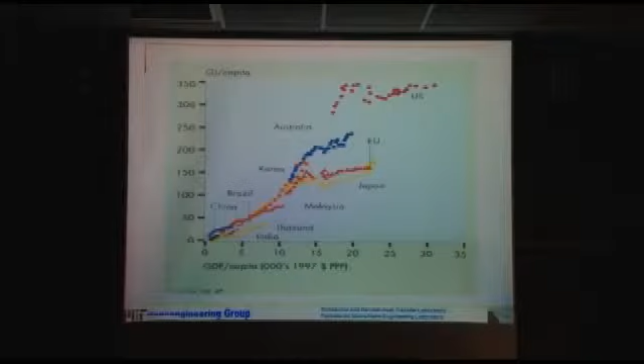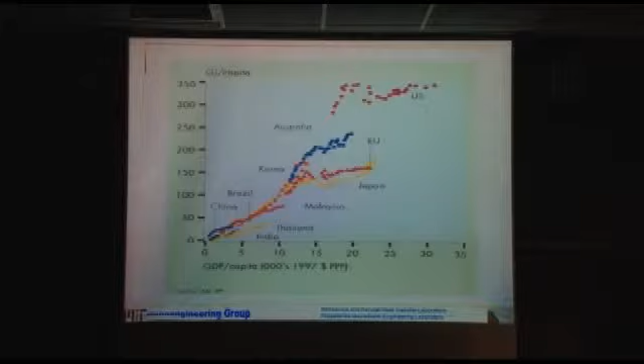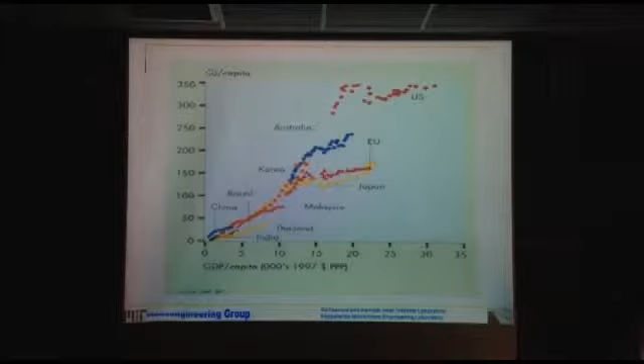And if we look at the energy consumption per capita, and here is the income in constant dollars, China is here, India is here, and the US is here. That's the energy consumption per year. So clearly, as people improve their income and livelihood, their demand for energy increases. And that's why even with this 2-some billion population increase, the energy demand will be even much higher down the stream.

And the projection is right now we're about 14 terawatts of annual energy consumption, and by 2050 we need about 25 to 30 terawatts. And 1 terawatt is 12 zeros of 1 watt, so 10 to the 12th power. And if you calculate, essentially, if almost every day we build one power plant, typically about 1 gigawatt, continuously over the next 38 years, we get about 12 terawatts. So that's the challenge. The energy demand is very high, and how can we do this economically and sustainably?

And if we look at the current energy usage, it is mostly through fossil fuels. We burn oil, gas, coal, and the renewable energy actually mostly comes from hydropower. So these fossil fuels release CO2 to the atmosphere, and that creates a big challenge in terms of temperature, global warming.

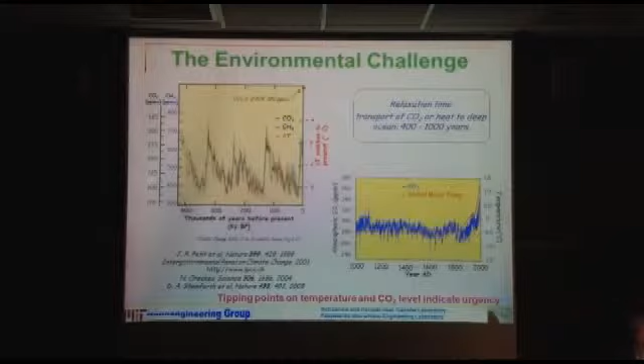So those environmental challenges, population challenges, and really at the end it's how we can address the energy demand economically and also without damaging the environment. So this is where solar energy eventually will play a very important role. If you look at the solar energy incoming to the Earth, on the Earth's surface, we get about 1,000 watts per square meter.

And if you multiply by the cross-section area of the Earth, that will get you about 10 to the 5th terawatts. And we said before, in 2050, the energy demand is about 25 to 30 terawatts. So if we can convert a small fraction of the solar energy into electricity and other forms of energy, we'll be able to meet our future energy demand.

But of course, here the challenge is the cost, because fossil fuels are very cheap. For example, electricity generation by coal is about 5 cents per kilowatt hour. So how we can develop energy conversion technology from solar energy into electricity at a low cost is crucial for the usage of solar energy.

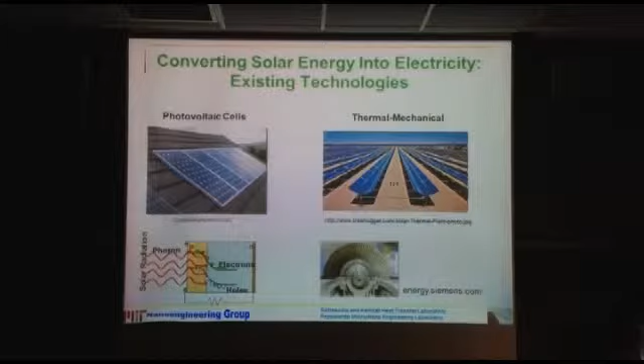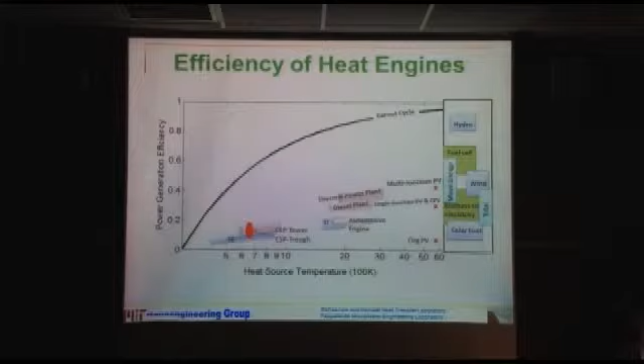Heat is less, say work is superior, heat is inferior to work. And we have to reject some of this heat to the lower temperature. And of course, the first law of thermodynamics tells the energy balance: what's the heat in, what's the heat going out, and the difference is the amount of work or the electricity you can extract. But why do you have to reject the heat?

The heat is usually considered random. There are random components inside. And work is very ordered, right? That random component, in scientific terminology, we measure it by entropy. So this entropy is carried by heat when you take heat from a high temperature source, and the work cannot take it out. So it has to go somewhere. You cannot destroy entropy, say reduce the entropy. You only generate it. When you have friction, you generate entropy.

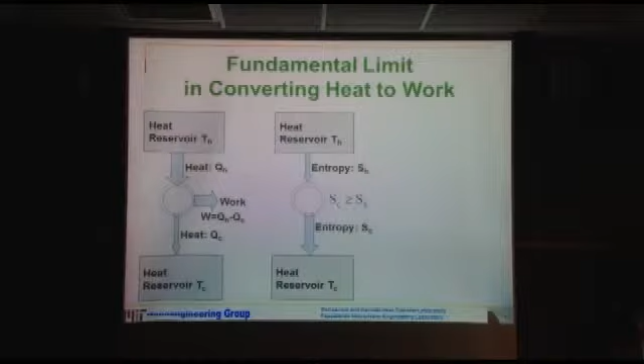And so at the end, you have to use another heat to reject it to the lower temperature. And the best you can do is to have the rejected entropy the same as the incoming entropy. So this is the limit. This is why we have to reject some energy. We cannot convert all the heat into useful work.

And it turns out that this entropy, we typically use symbol S, is related to temperature, and times temperature, it gives us the heat. So with this, you can actually derive, under the condition that the best you can do, the entropy going to the low temperature reservoir. In this case, it could be a river, it could be the ambient air, that's the low temperature reservoir we typically use. And then you burn fire, so the temperature could be 2,000 degrees, and the environment in absolute temperature is about 300 Kelvin. So that gives you the so-called Carnot limit of converting heat into electricity.

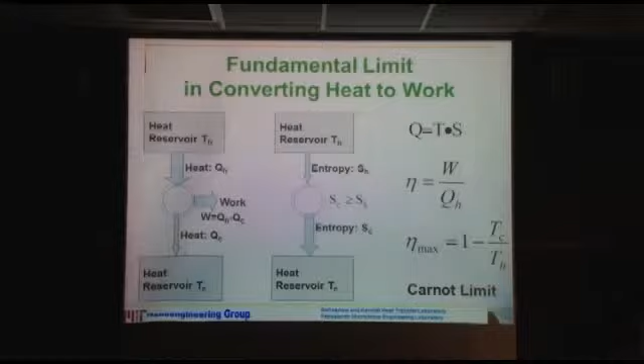But the reality is, if you think about the sun, the temperature of the sun is about 6,000 Kelvin, and ambient is only 300 Kelvin. So we should be getting over 90% efficiency. And if you think about burning fossil fuels, we get about 2,000 Kelvin, and the ambient is only 300 Kelvin. And again, we should be getting over 80–90% efficiency. But we are far below that efficiency. And that's because there are always these non-ideal factors.

So if we take the solar cell, that's the silicon material that people typically use and put on the rooftop, and see where those energies are really lost, right? Silicon is a semiconductor, and the name semiconductor means there is a region where no electrons can exist. That's called the band gap. And this band gap, in scientific terminology, is about 1 electron volt. Different materials have a different band gap, and for silicon, the band gap is about 1.1 electron volt.

And so when a light quantum, that's the photon, comes and meets the semiconductor, it gets absorbed. So that energy is converted, right? The light quantum energy is converted. And what it does is raise an electron from the lower energy to a higher energy. And with that, we want to collect this higher energy electron before it falls back to the lower energy. So that's the challenge there.

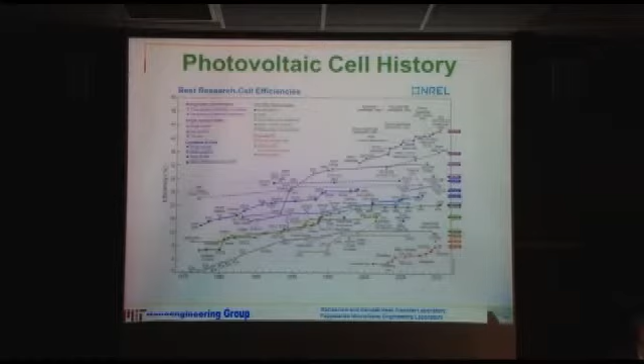So another challenge I want to mention: although there is a lot of solar energy and we only need a little area, the problem is the solar energy is very dilute. It's about 1,000 watts per meter square. Sometimes we use a 100 watt light bulb, so per meter square the total energy coming in is only about 10 light bulbs.

And so how does that compare to gasoline? Gasoline's energy per kilogram is about 45 megajoules. If you do your math, one tank of gas is, let's say, 10 kilos, and 450 megajoules. And I compare one meter square solar cell with 15% efficiency, and the energy generated in one year is only about 2 tanks of gas. That's the energy content.

So this is the challenge, because you have to reduce that cost. Otherwise, it's hard for people to buy into the technology. So cost is really essential. And the cost is rapidly dropping down. This is based on per peak watt, how much, say, 1 watt of the solar cell installed costs. Look at 2004 compared to 2010: 2004 is about $8 per watt, and 2010 is about $3.5 per watt.

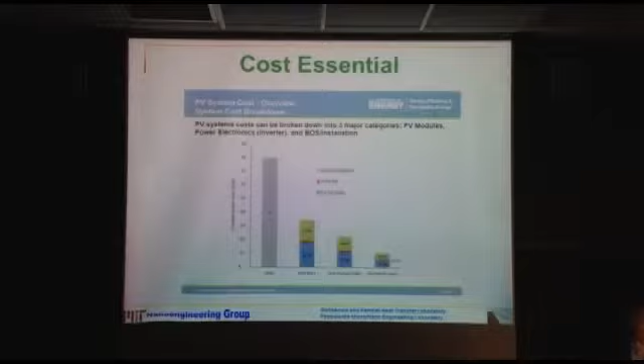And converted into kilowatt hour, if you assume a lifetime of the solar cells, let's say 20-year lifetime, which people typically assume, the cost of electricity is about 20 cents per kilowatt hour. As I mentioned before, the coal-fired power plant generation cost is about 5-6 cents per kilowatt hour. So about a factor of 3 or factor of 4 in terms of the cost you want to drop.

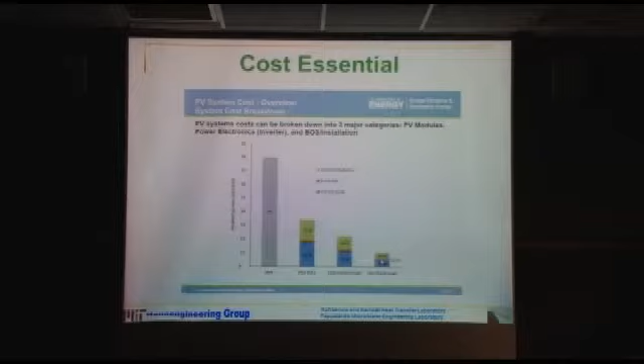And that's why the U.S. Department of Energy, DOE, set a very ambitious goal here, get to $1. So that's a factor of 3.5 drop in the cost. And this is not just the cell itself, it's the frame, everything included. And with that, this technology will be able to compete. And overall, my point is, converting solar energy into electricity, cost is essential.

Now, I want to turn a little bit to solar thermal technology. First I talked about solar electricity, and with solar thermal, not many people mention it, but it's actually widely deployed in developing countries. And here is a graph from a solar heat report from the International Energy Agency. And this is the deployment of,

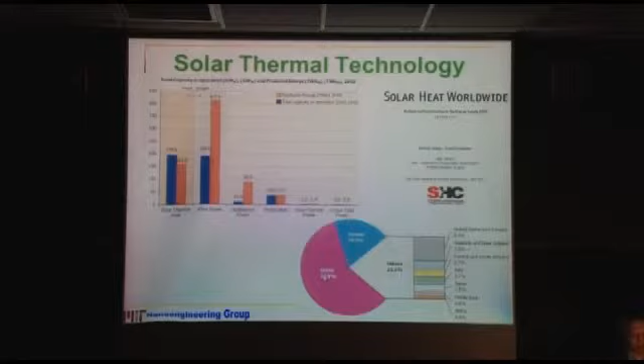here is the heat, here is the power. And you can see the solar thermal as heat, in terms of terawatt hours here, is very large. And there is a huge amount of deployment in solar thermal, particularly in China, where I grew up. So why is this popular?

And this is an interesting example of a solar thermal plant I visited. This is the production line here, used to deposit this coating on glass. And this coating absorbs the solar radiation, but when it's heated up, it does not re-radiate. So it has very little heat loss. This is because it has a vacuum.

It's a double layer. So you can see the outside is a glass. Here is the glass. And the inner is black. The black coating is seated on another layer of glass. Here is the seal. And in between is a vacuum chamber.

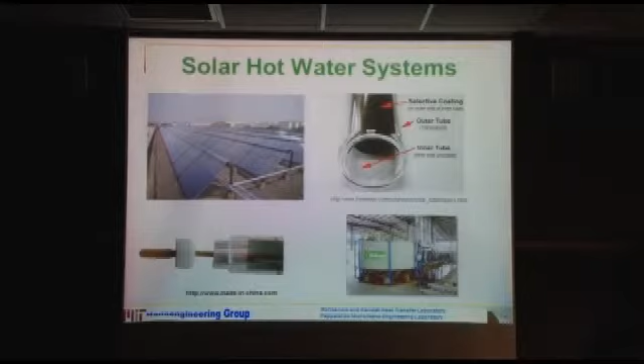And this was a really interesting story because I met the professor from Tsinghua University who developed it. He was an electronic vacuum tube guy. During China's Cultural Revolution, he was sent to the countryside. After he came back to Tsinghua University, the vacuum tube was gone. Everybody was using solid state electronics. So he started thinking what he could do with his skills, and he invented this solar hot water tube.

It's a vacuum tube. A typical family installing 1 to 2 square meters costs about $300. So it's very cheap, and it's life-changing. When I grew up, I didn't have hot water, so it was difficult to take a hot shower. And this has changed millions of people's lives.

In fact, the installed area in China alone is 130 million square meters. If you think about 1 to 2 square meters per family, this is 60 to 100 million family households. So it really has changed people's lives.

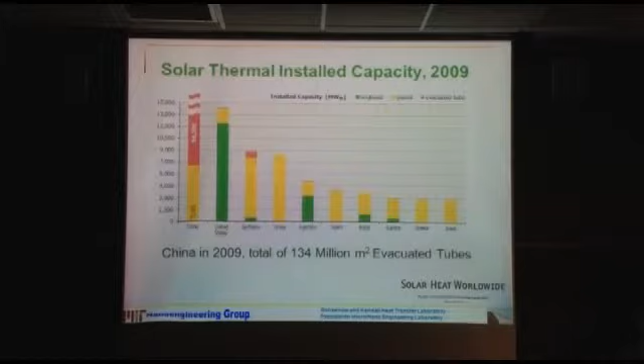And this is where I got some inspiration: can we use this and yet generate electricity, because the solar vacuum tube there is only for hot water. It's deployed in many households. And my question is, can we generate electricity also cheaply? So that comes to the solid-state thermoelectric effect.

The first one is the Seebeck effect. That's when you have a temperature difference across a conductor or semiconductor, one side hot, the other side cold, you can measure a voltage. This effect was discovered a very long time ago, 1821. People used it in labs to measure temperature, so they call this a thermocouple. They put the two materials together and measure temperature. So this is only as a sensor.

And the other is the Peltier effect. It's named after Peltier. After Seebeck discovered that effect, Peltier discovered that if you pass a current through two materials, one side freezes and the other side heats up. He demonstrated you can make ice out of it, even very early on. So all those effects are called thermoelectric effect.

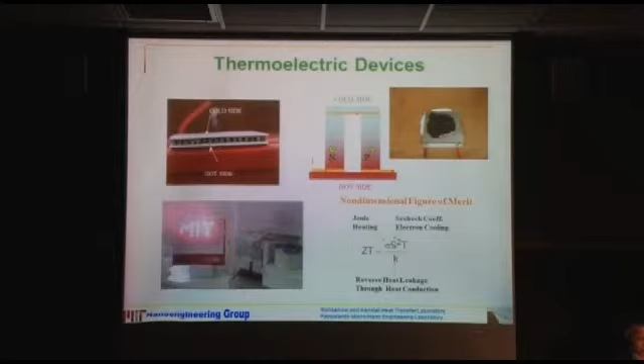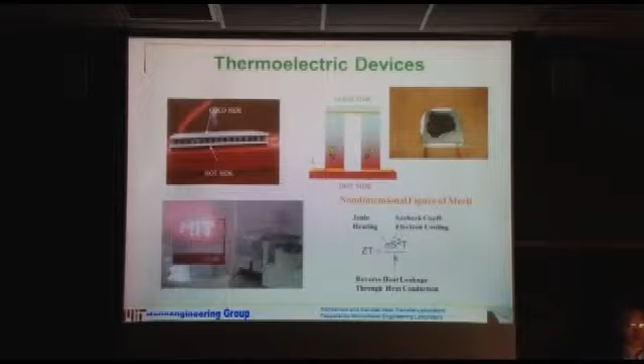In our case, the material itself has to be the thermal insulation. So it has to have a good thermal insulator, a good electric conductor, and we want a large voltage per degree temperature difference. That's difficult, and this is where material research has been very difficult. Since 1950 to 1990, there hasn't been much progress. Those devices were invented, developed, and commercialized in the 1950s, but they really haven't gotten into large-scale application because the material performance isn't quite there.

So we have been working a lot on thermoelectric materials. Later on, I'll show a little bit on that. But what I want to demonstrate next is how we can take this to make a generator. So this figure of merit is a material property.

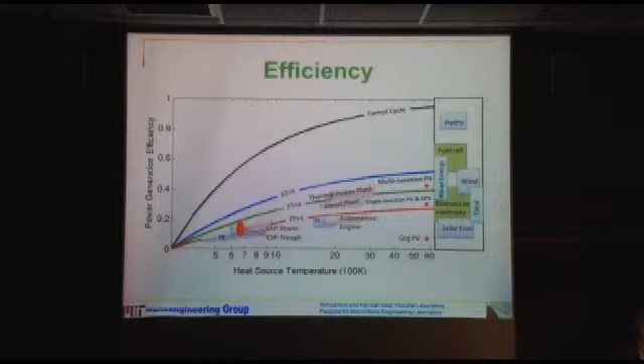And here is the Carnot efficiency. You can see the commercial material is about 1, and in fact it has a temperature dependence, so it's about here. If we can improve this, we'll be able to make solid state energy converters, and that can have a lot of applications - not only just in solar.

So now let me come to solar thermoelectric energy conversion. Basically, now we have the idea: if I can create a temperature difference across the solid state material, I'll be able to generate a voltage and generate power.

If you check the history, this idea was first patented in 1888, and at the time, the materials were very poor. In the 1950s, there was an experiment done by Maria Telkes, and she demonstrated you can get about 0.6% efficiency. That was about the same time the solar cell, the photovoltaic cell, was invented. The photovoltaic cell won out, and that field has steadily made progress, while this has stayed at this same number since the 1950s - really low progress.

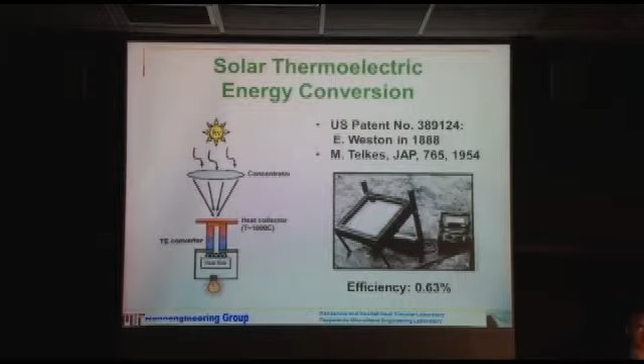So when we look at this, the first question is how I'm going to create that temperature difference. This is a heat engine, so the larger temperature difference, in theory, the better. I do a very simple calculation. The heat flow equals this material property we call thermal conductivity, which has a unit about 1 watt per meter Kelvin, and if I want a 100-degree temperature difference, and this is the thickness of that material, L.

So I say, okay, if I want 100 degrees, and I have a sun, that's the flux from the sun, 1,000 watts per meter squared, I need about 100 millimeters. And this is immediately related to material cost, because with a lot of material you won't fly with that. So the key is how I can concentrate the sunlight to get a higher heat flow.

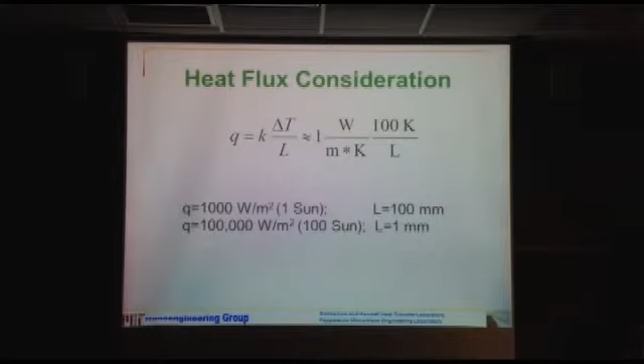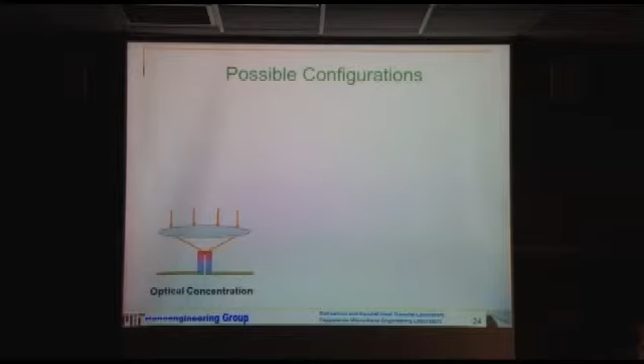And of course, it's easy to say I'm going to use a lens or mirrors, or various technology people have been using for solar thermal power plants. But we know that's not going to be cost competitive, because based on material properties, I cannot build a solar cell as good as a photovoltaic yet. So I cannot do this big tracking structure with the mirrors, and that's not cost effective.

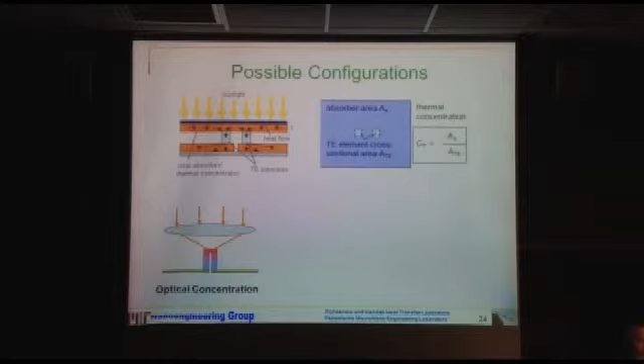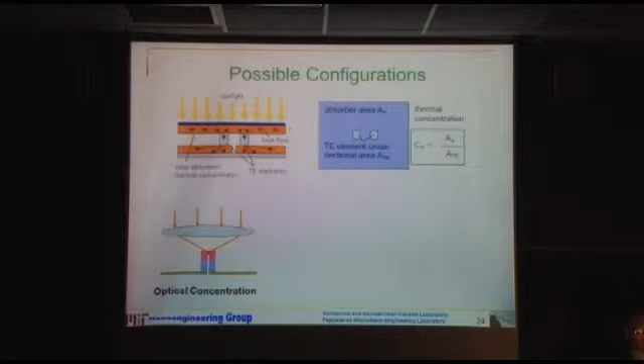So what we took is this vacuum tube idea. What if I put this device in vacuum? I have a surface to receive the sunlight, and this is in vacuum, so the heat received has no place to go. They are forced to go along the copper we use and to the material itself. So now I have a piece of metal, aluminum, and copper coated with this absorber, and these are the thermoelectric legs. And if I take this area ratio as my concentration, I call that thermal concentration, then I can do a thermal concentration without the optics, and that way I can potentially reduce the cost.

I could also think about some optical concentration, and that's where you have to do your cost balance and combine them together. So those are some details.

It turns out the efficiency is not just due to the materials, but when I raise the temperature of this surface, I also lose heat. So we have to care about the heat loss, even though it's in vacuum, but when the surface is hot, you will radiate out the heat. That's why we need those surfaces that can minimize that heat loss. And this is the same even for solar hot water absorbers, collectors.

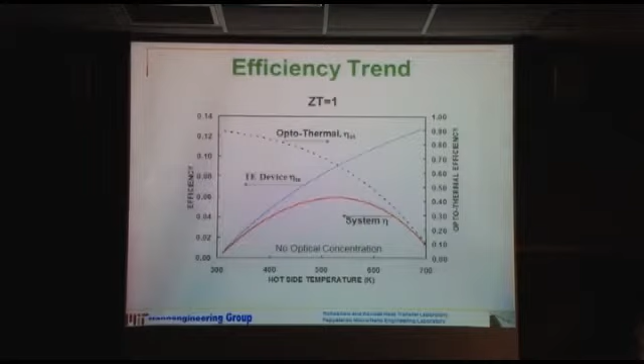So with that, we have some prediction of efficiency, and it's not very high with this current material, but it's very respectable, because when people look at solar, anytime you're about 5-6%, people start to pay attention, because the amorphous silicon solar cell is also just in the 6-7% range.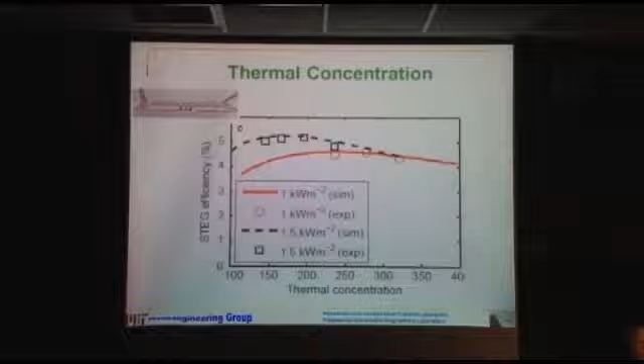And I say this thermal concentration, why is it important? That's because this material we use is a very small amount. So I have a big pixel absorber, but my generator material is very small, and that way we're reducing the cost. And because of material cost, with this we can reduce the generator cost to 10 to 20 cents per watt. So that's the beauty of using this thermal concentration.

And this is another interesting aspect. In solar energy, one of the problems is you have climate change, you have clouds. So when a cloud comes in, for example, your solar cell immediately has no sunlight going to the surface of the photovoltaic, and you're out of electricity. That turns out to be a big headache, and this is the same for wind. And that's why a lot of times people actually have to build another power plant just beside those renewable power plants to provide backup leverage.

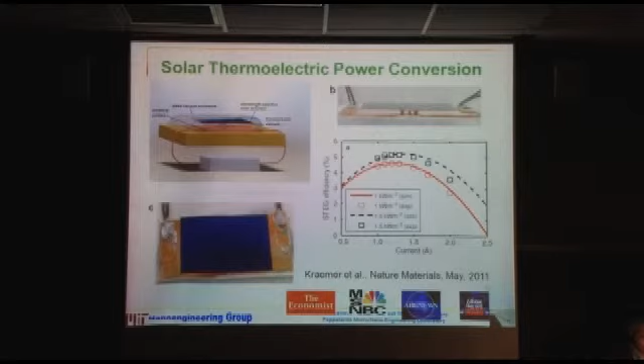So in fact, after this, we had a spin-off company, GMZ Energy, and it has very good investors - BP, GE, and Kleiner Perkins. So this is ongoing, and hopefully we'll be able to put this in the market in the next year.

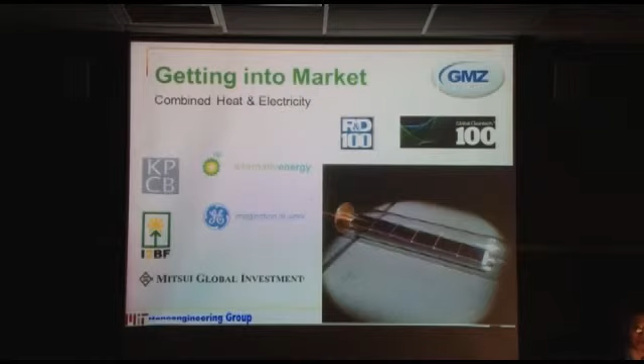We are also looking at what if we go to higher temperature? This is a simulation of putting two materials together, going to higher temperature, and it says potentially when I combine two materials with optical concentration at 100 times, I should be able to get about 15% efficiency. Of course, this is only modeling simulation - there's a lot more work we need to do.

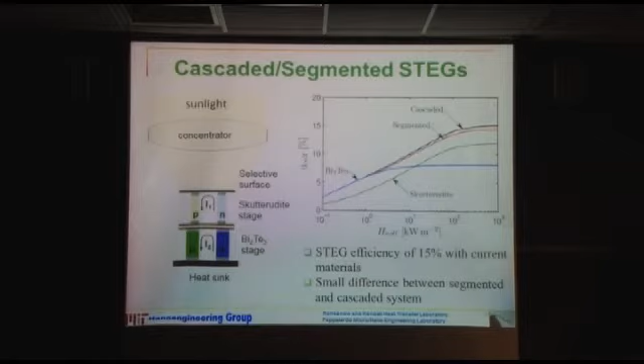And also, when you do this, you have to ask, what's the cost? Can I eventually be competitive? Because as a technology, there are a lot of different approaches, and you have to make them attractive.

So here is one slide to show - I do a lot of work in nanotechnology, and the idea we have for how we can improve ZT is to actually fragment the material. So we use mechanical ball milling to make a nano powder, and then we recompact them into a bulk form. There are a lot of interfaces in this material. Even though it's a bulk piece, there are a lot of interfaces, and this interface serves as a barrier for the heat flow.

It's like heat is due to acoustic waves - what do you hear there? We know that when there is a surface, there could be echoes. And if I create a lot of these interfaces, these high frequency heat waves propagate in the material, hit the interface, and echo back. With that, we can improve the material, and we have demonstrated this in a lot of material systems.

And this is a very big effort in our research, but I want to say this is actually very gradual. A lot of people are working on trying to improve those materials because, as I said before, from the 1950s to 1990s, there's not much progress in the materials. Then in the 1990s, people started thinking about nano - how we can engineer better using the physics we learned in nanostructures to engineer better materials.

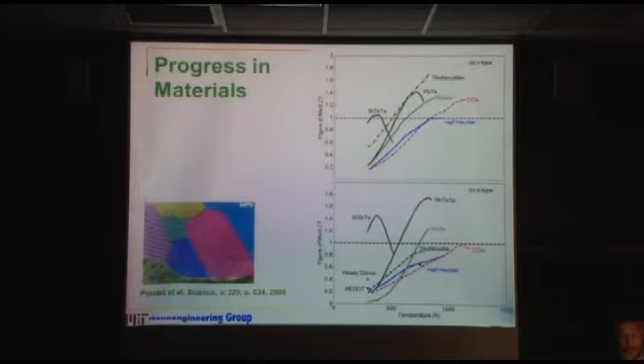This is one example of what happens if we go to higher temperature, with this specific material called skutterudites. When we go to 500-600 degrees, we get about 10% efficiency. So of course, these are heat engines - the higher the temperature, the higher the efficiency we'll get.

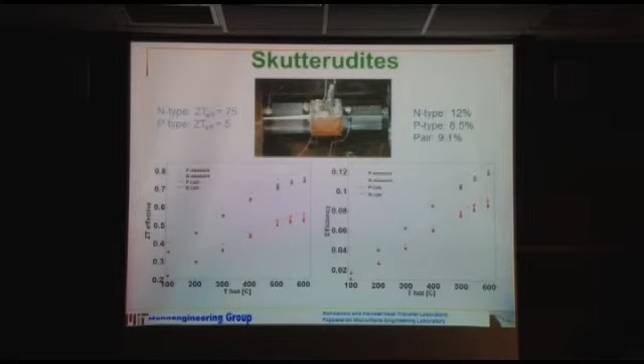And let me talk a little bit about the other application, because I said solar heat, right? But in fact, if we think about the importance of heat that we encounter every day, we cook, we have our home furnace, right? If you look at the heat problem from two perspectives, one is looking at the efficiency, utilization perspective. The other is looking at the source perspective.

And you can see that we're actually losing about 60% of useful energy. We only use 40%. And I said before, Carnot efficiency is typically around 80 to 90%. So we are far away from what we could achieve theoretically. So recovering this heat, if we can recover, say, half of this heat, 60%, we really reduce significantly the energy demand and reduce the environmental impact. So that's one view, one way to look at it.

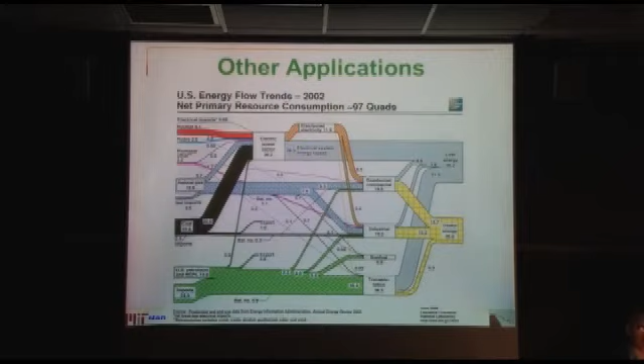And the other is to look at the input side, right? From nuclear to fossil fuel, coal, natural gas. It turns out that we all use it first as heat, generate heat, drive a steam turbine. So over 90% of energy is actually used as heat. So this is where, if we think about the heat, whether we can use the thermoelectric technology to improve the efficiency of the usage as well as the conversion process.

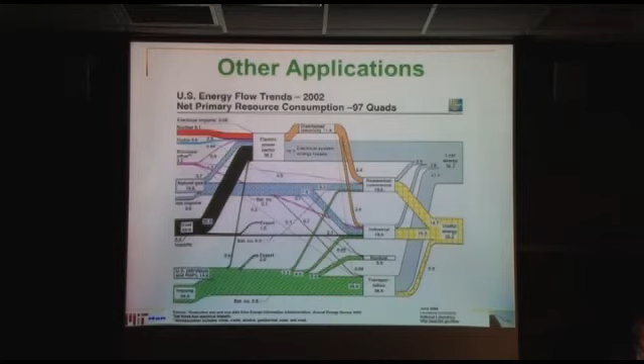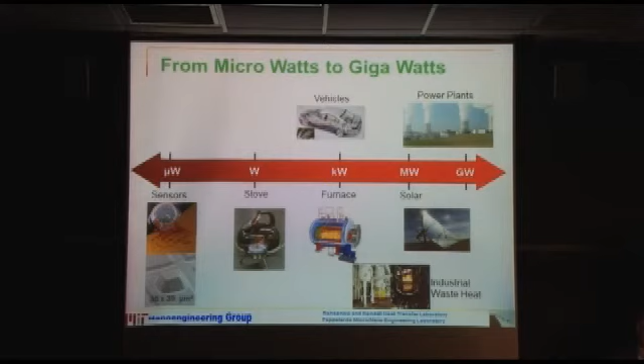So indeed, there are people looking at various possibilities. And I mentioned, of course, solar thermal. And it turns out a big effort now is in automobiles, because automobile efficiency is only about 20%, and we are throwing out the rest of the energy as heat. And of course, industrial process and home furnace. And roughly, we use about 1/3 of energy for transportation, 1/3 for buildings, and 1/3 for industrial process. So everywhere we look, we can see the opportunities.

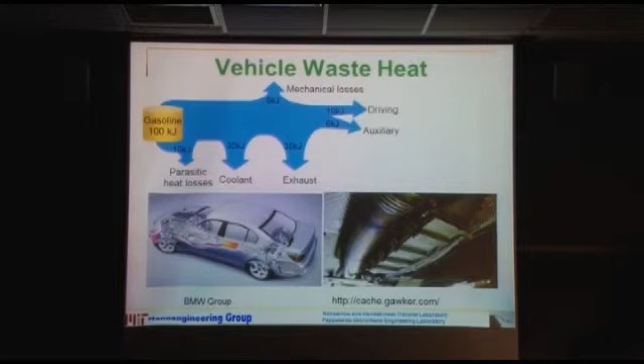And heat, for example, in the automobile, I mentioned it's about 20%. And again, about 1/3 of the heat goes through the exhaust pipe. 1/3 of the energy goes through the radiators. So now a lot of countries have legislation, particularly Europe. It says that by 2018, if you sell a car and your CO2 emission per kilometer driven is 1 gram above the standard, you pay €95 in fines. So the auto manufacturers are very serious about reducing their CO2 emission. That's policy driven.

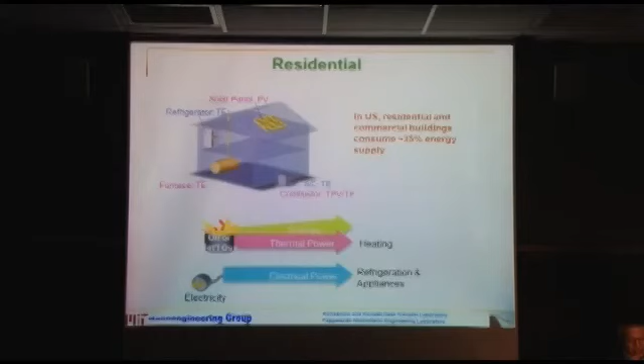But there are many other possibilities. For example, if we look at the household, right? In your basement, you have the furnace, and it burns fuel, gas or oil, and it creates a 2,000-degree hot source. At the end, we only heat up hot water, right? A power plant generates steam and drives a steam turbine. But you can't do that easily in a household. So solid-state thermoelectric generators could be very useful for those applications.

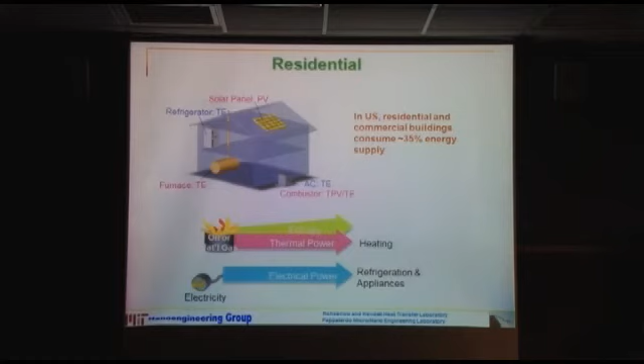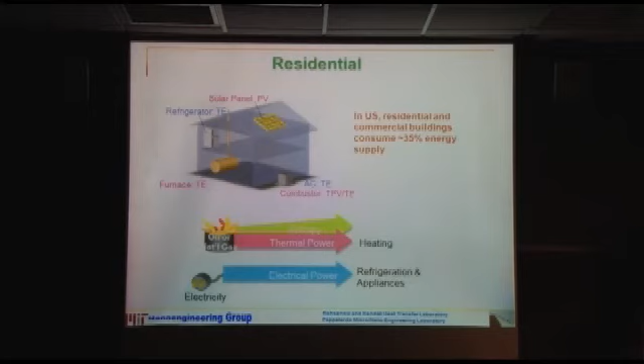And I can give other examples, industrial waste heat. So we have a very big effort in the startup. We have said where we can use this. Because when you have startups, you have to think about the economy, right? That's the important aspect. So this is one example. If I can use this to first take out the energy as electricity before we heat up hot water, I have, again, a one stone, two birds situation.

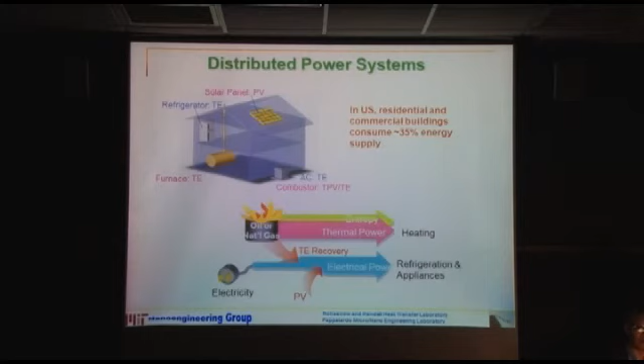And our center looks at how we can tailor solar energy and use it in the form of heat. So we look at the fundamental science of photons, the sunlight, and converting it into electricity. And then we have to look at the heat aspects, the phonon, the lattice, the atom vibrations. With that, we are looking to create a really transformative technology in thermoelectrics and also photovoltaics.

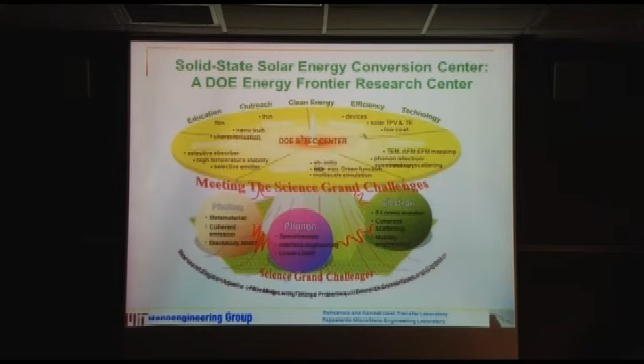And with that, I want to acknowledge, most of the time I'm giving talks, it's really the students and postdocs in the lab. They're working very hard. And I also want to acknowledge my collaborators. I do not make material. Professor Ren at Boston College makes the material. And this is Professor Dresselhaus at MIT. We have been collaborating. She's a pioneer in this field, a very well respected lady, an MIT Institute Professor. And this year, she got the Fermi Award, a very prestigious award.